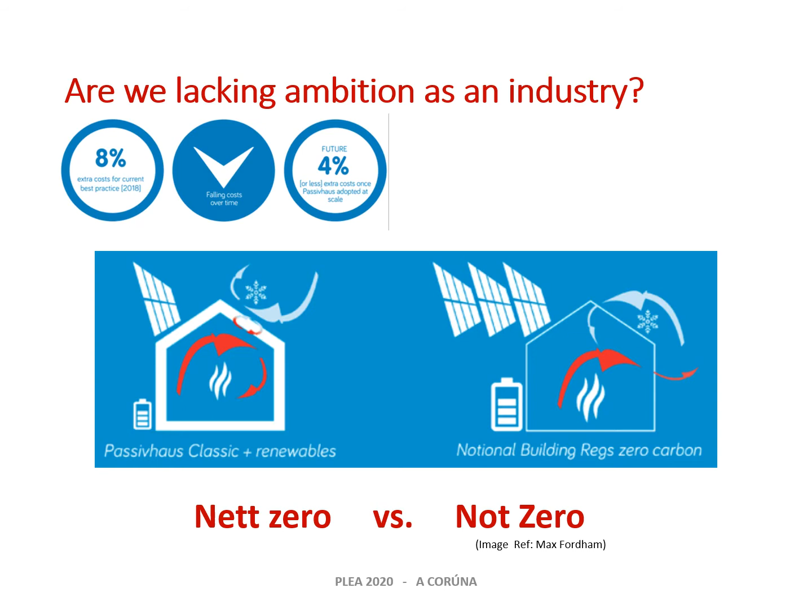It seems to me this is because we are lacking ambition as an industry. We are building to not zero or nearly zero standards, whereas we should be building to net zero standards, which will still be relevant in 2050, rather than lower standards which will have to be further renovated to avoid lock-in over the next 10 to 15 years.

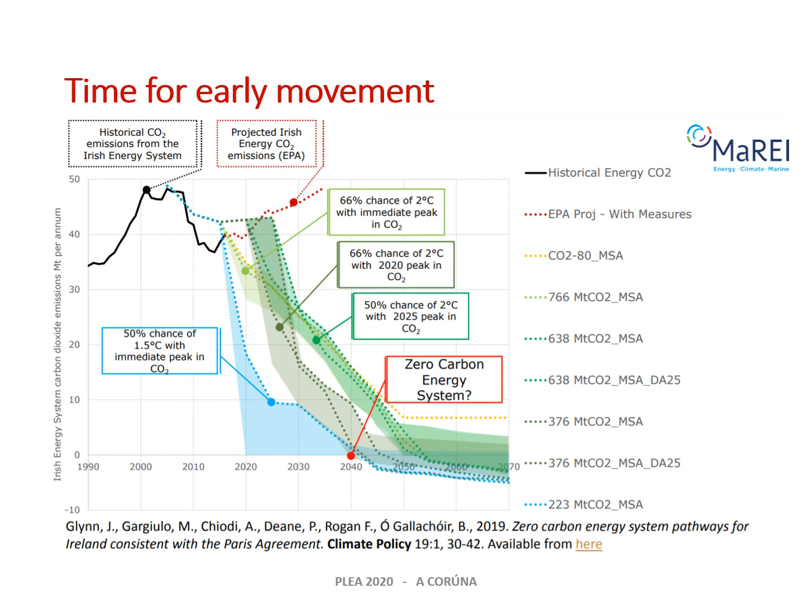This opportunity for early movement is highly desirable because it creates space to improve our chances of keeping climate change to less than 1.5 degrees, reflective of the Paris Agreement of 2015. It seems beyond debate at this stage that this is what we need to do.

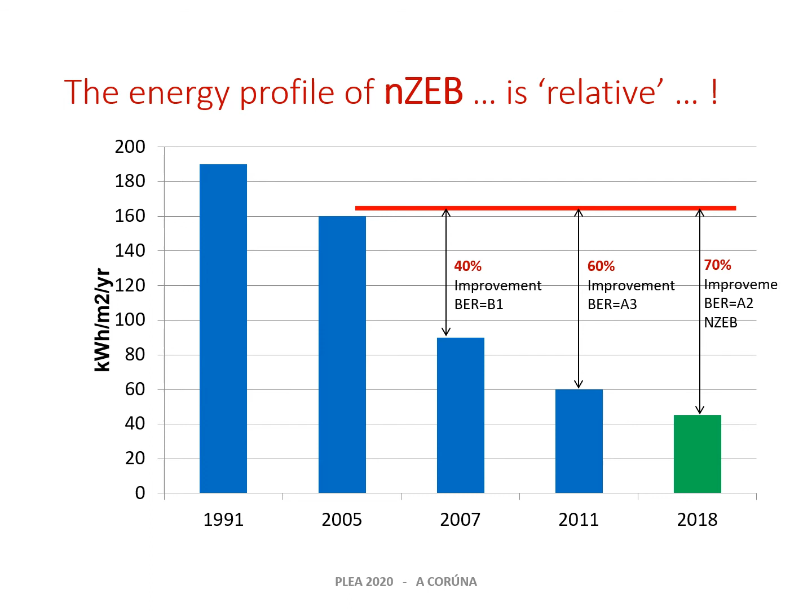Yet we have an energy standard, Nzeb, which in effect is relative, right across Europe, because each national state has been allowed to set its own Nzeb standard. This one in Ireland is in fact relative back to our standards in 2005, as opposed to being specific, which is what Passive House is.

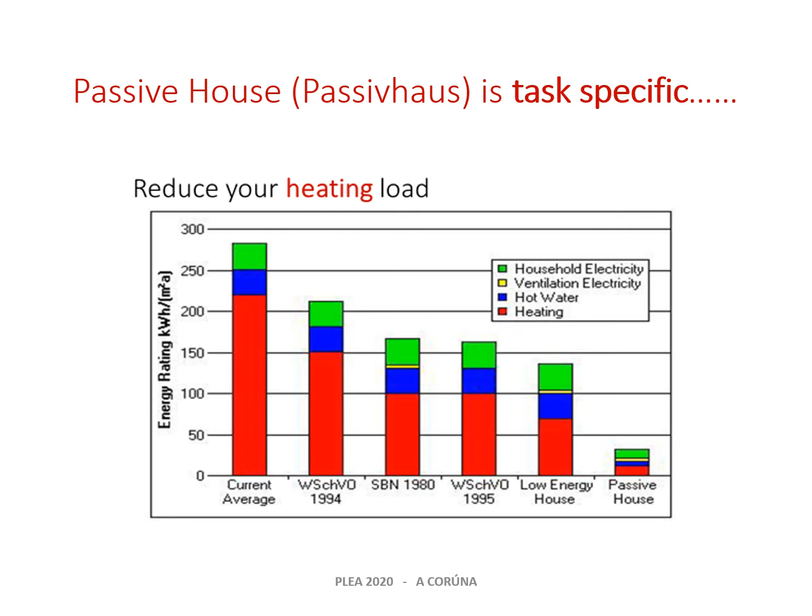Passive House brings clarity in that it addresses heating load, minimized heating load, along with air tightness and fabric performance. It's this level of accuracy we need to get to.

So it gives a level of clarity, and that clarity goes beyond the Nzeb reference to being cost driven, whereas Passive House in effect is fabric driven. It's a much more specific use - it's science, it's specific. Whereas Nzeb, under the legislation, has to be cost optimal.

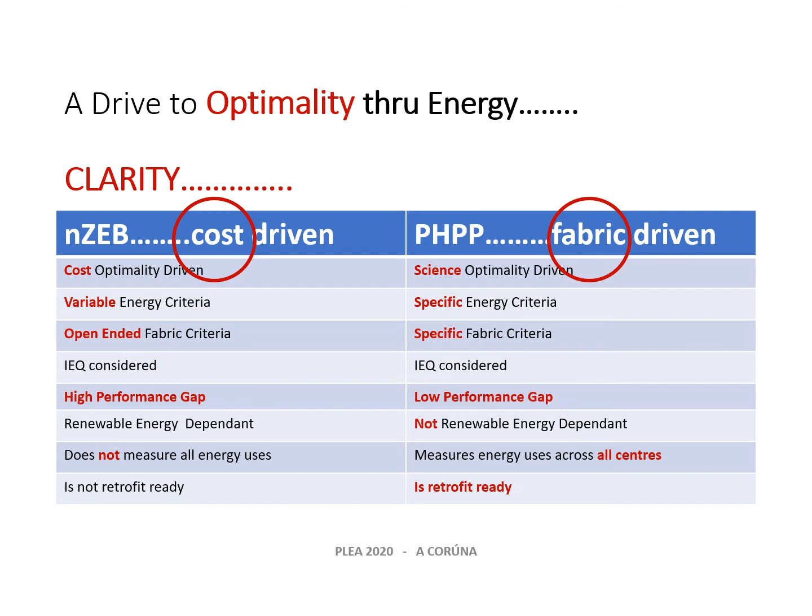So it's trying to keep what is a fairly mediocre construction industry engaged with the process, as opposed to saying, actually, that standard is not good enough, we need to move on.

And we need to move on because of our resources. The resources we put into achieving Nzeb, in many ways, is a moderate level of waste, particularly of labour. Whereas Passive House, by bringing us to a standard which will stand the requirements of 2050, makes for a much more resilient use of resources, and that is where we need to be.

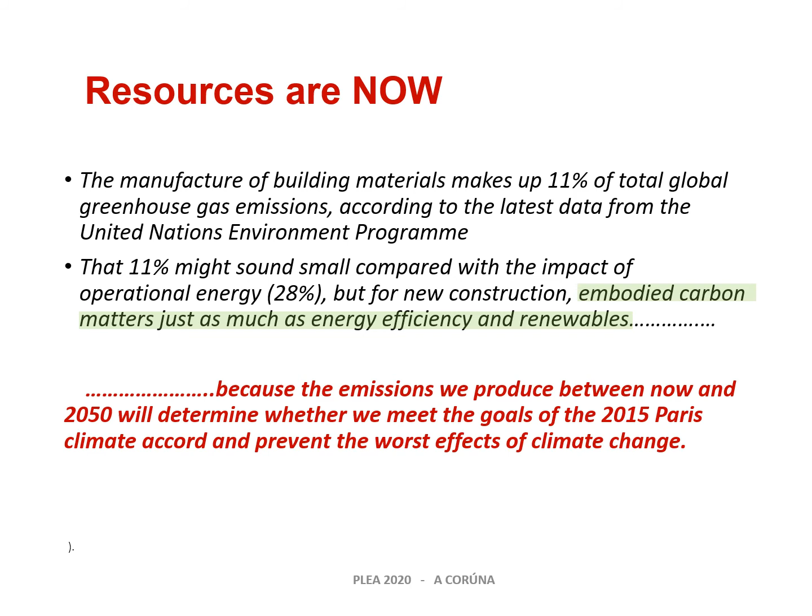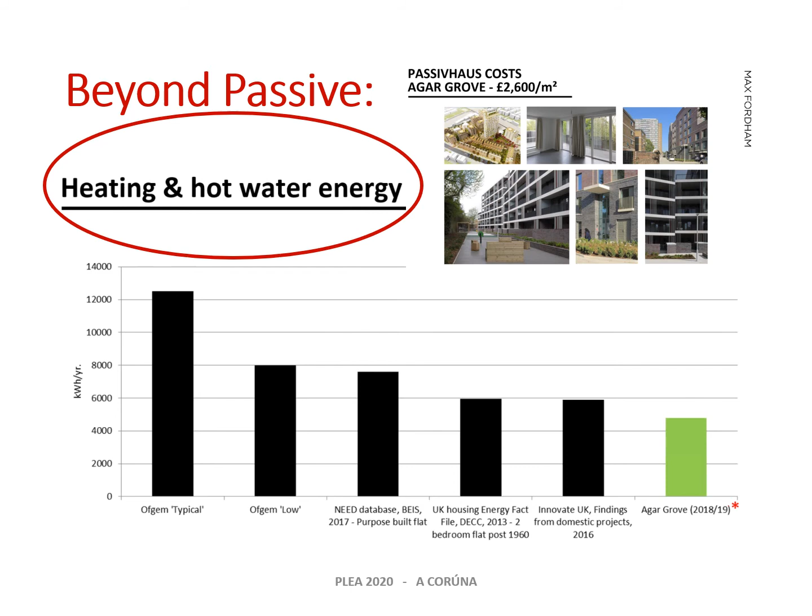It's undoubted that we are at passive. This is an example from a London project, Agar Grove, which has gone beyond passive and has concentrated in quite minute detail on heating and hot water energy, bringing energy standards right down for what is in effect both a social and independently owned housing development. And that's where we need to be.

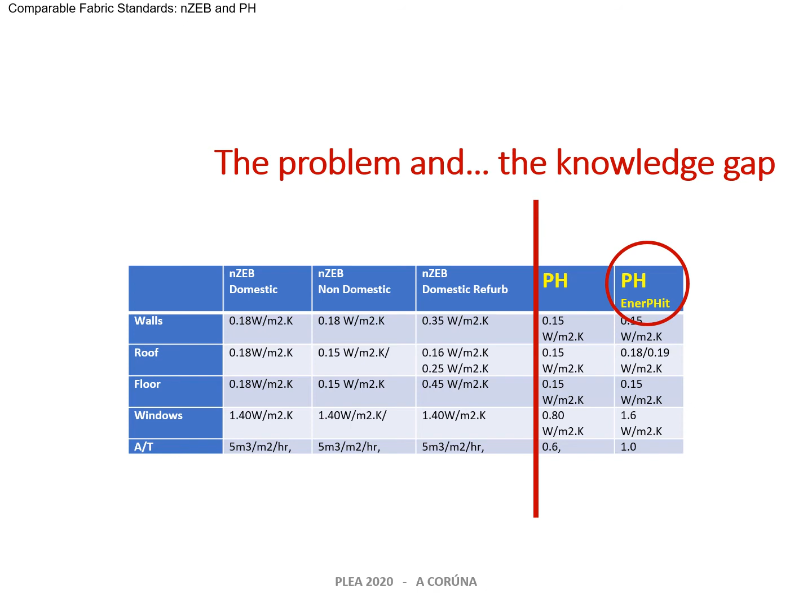Whereas in the Republic of Ireland at the moment, we're dealing with U-values reflective of an Nzeb standard, which is reflective in effect of the market and its market optimality, as opposed to energy optimality, which is basically dealing with Passive House - in particular Passive House EnerPHit - because where we need to be in the years ahead relates to renovation. Renovation is the big challenge, and we need to move beyond the market at the moment.

So at the moment in the Republic of Ireland, we have a market equilibrium - an energy balance between a decarbonised grid, which we are completely reliant upon, and Nzeb software. Whereas the truth of the challenge lies in between.

So we need to look at how we are addressing our supply grid and resource allocation. We need to look at embodied carbon, which is a major issue, and planning use and carbon related to that use. We need to break open this balance and look at how we allocate resources as if science matters.

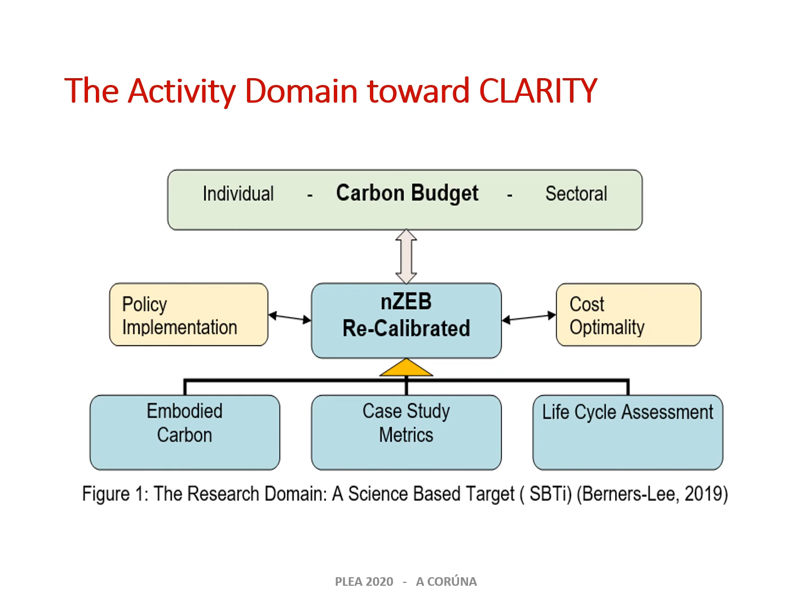In regards to that, the activity domain, certainly in terms of clarity and my PhD research, deals with an Nzeb which is recalibrated, one that deals with case study metrics, embodied carbon, life cycle assessment - which means we will move beyond cost optimality into a policy implementation efficient in terms of resources, time and carbon usage.

So by concentrating on fabric, particularly in Northern European countries, we can really begin to address the accuracy of what we're trying to do, and also the accuracy of an improved, broader platform of Nzeb.

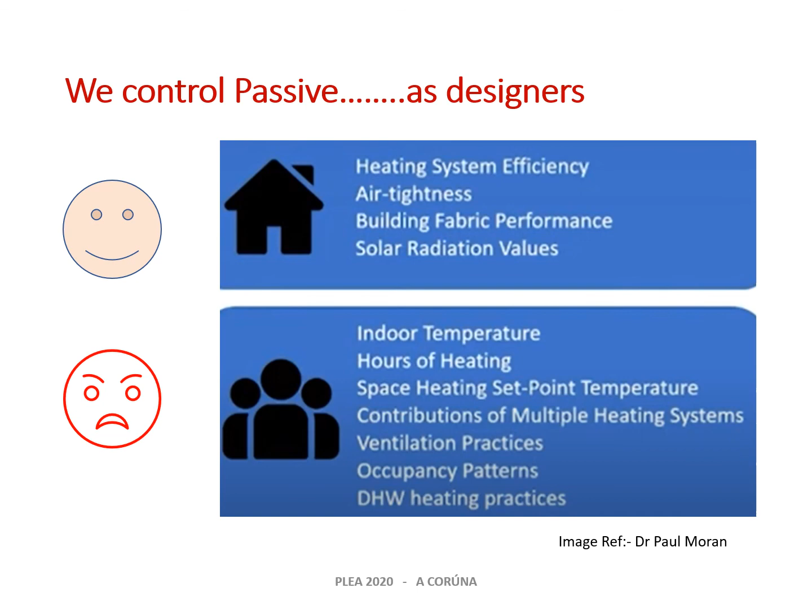So in summary, we need clarity in terms of Nzeb implementation with increased optimality, and that will reflect itself in fabric. Our 2050 knowledge requires us to set this Nzeb implementation against carbon budgets.

In other words, demolitions and so on will have to be justified according to our carbon budget and the time limitation we have in effect for 30 years. And we will have to do this and review the Energy Performance of Buildings Directives within the next 2 years.